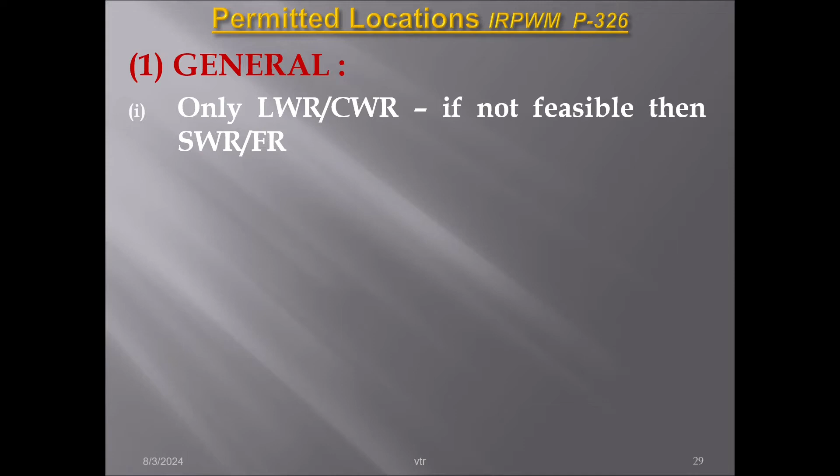Also in yard lines, many yards still have fish plate track. Fish plates give us a lot of headaches, so we want to avoid them. In yard lines also nowadays we are planning for converting existing fish plated or SWR track into LWR, particularly in running lines, provided the condition of rails, sleepers and fittings is alright. With the approval of the Chief Track Engineer, we can convert those lines also into LWR.

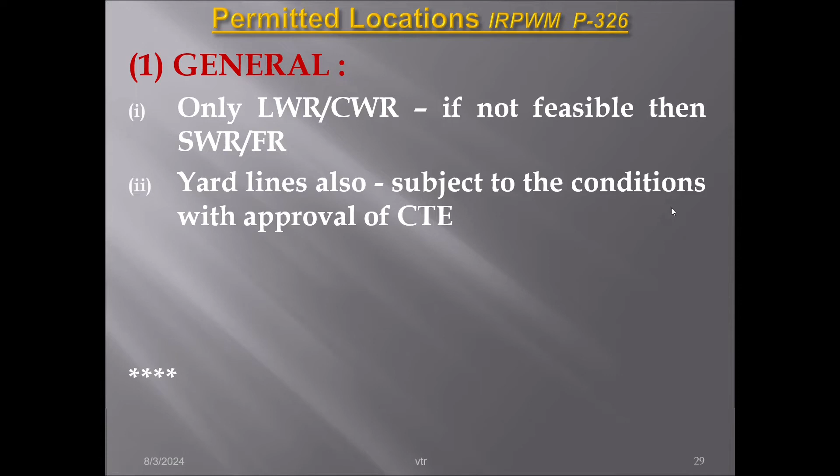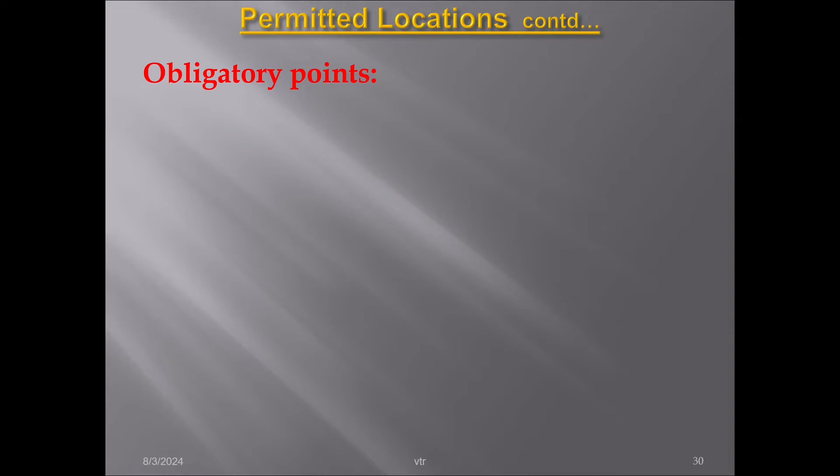This is something about the general provisions. Coming to the other locations, permitted locations - for example, suppose we want to have the track between X and Y, the particular stretch, so we may want to have the LWR.

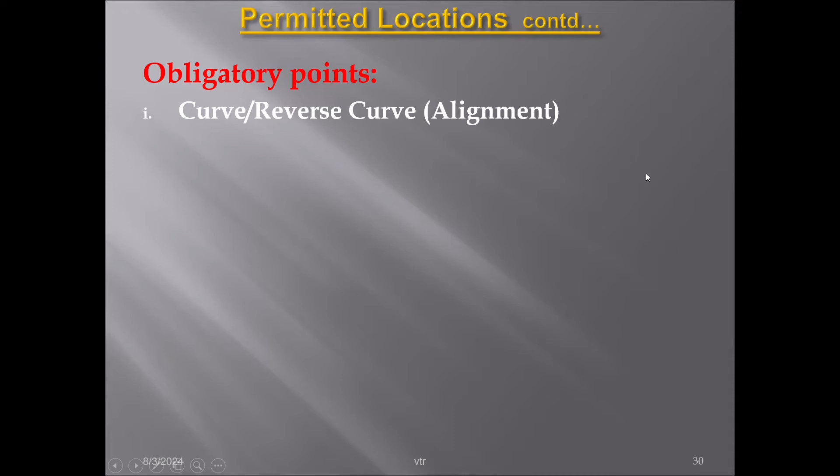There will be a lot of obligatory points we will come across, namely the curve - normally a sharper curve, we cannot go for LWR. Also the gradient - a steeper gradient we are avoiding, and level crossings. On bridges, we have ballasted bridges and girder bridges, and here also we have a lot of limitations. Points and crossings can go, but these are the obligatory points. So curvature - what's the sharpness and limitations - and gradient - what are the limitations - these things we are going to discuss in the coming slides.

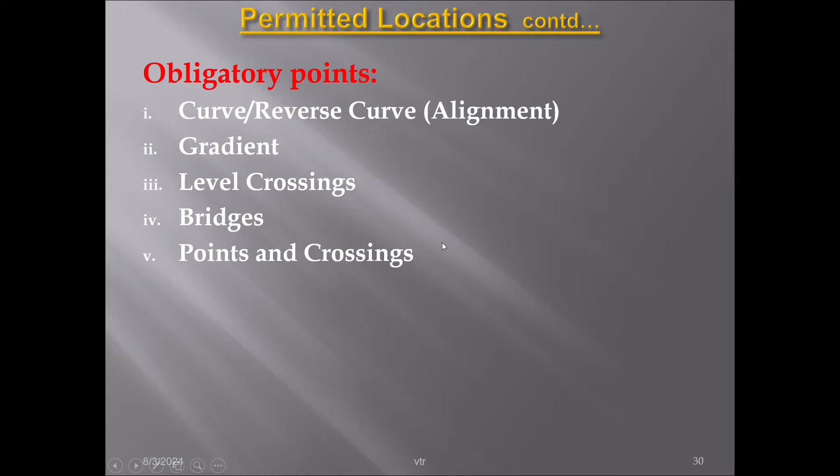Coming to the curve, that is alignment - normally suppose we have 60 kg rail and 1660 sleeper density, we can go up to 6.5 degree of curvature in zone 1 and 2, up to 6 degree in case of zone 3 and 4. These are the provisions available in the manual. Sharper than this we cannot go, and these are given zone-wise.

Also joining with the steep gradient, the steepest gradient is given, so gradient has to be considered. If it is a plain track, normally 6.5 degree in zone 1 and 2, and zone 3 is 6 degree. Suppose we have curvature with gradient, this is the limitation - 5 degree with 1 in 65, the sharpest permitted grade, the steepest gradient. This is the provision available, and we are supposed to follow this.

Because the curve is already a designed curve we have, but whenever there is a temperature increase, there will be setting up of compressive force, which will also try to give the buckling effect, that is bursting force. So joining with the designed curvature should not get aggravated and buckle. That is why if sharper curvature is there, more will be the bursting force - that is why we want to restrict the curvature sharpness. At the same time we are providing shoulder ballasting and strengthening, but even then the sharpness is limited. So this is the restricted curvature as per the Indian Railway Permanent Way manual.

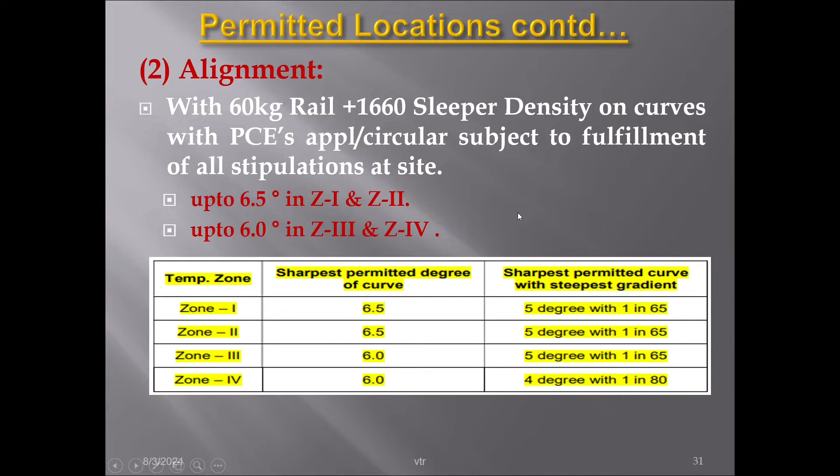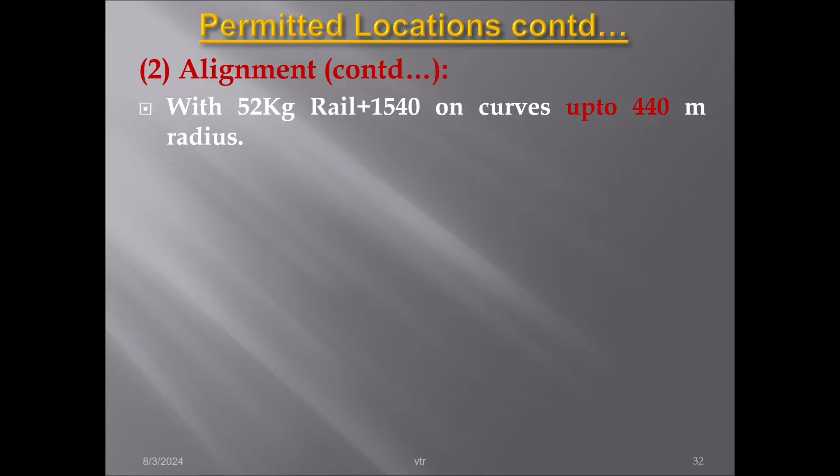1540 sleeper density in the 52 kg rail. Earlier we were having 52 kg, but now everywhere we have 60 kg rail. Whenever we do TR or CTR we go for 60 kg only. But in existing track still we have some places with 52 kg 1540 sleeper density. In this case the curvature can go up to 440 meters, that is 4 degree curvature. Up to 4 degree we can go.

Also in the case of zone 1, they are given some relaxation to 350 meter radius. So up to 5 degree we can have some relaxation. This 52 kg 1540, in zone 1 they are given 350 meter radius, up to 5 degree we can have.

Duly satisfying the following conditions. Because zone 1, as normally already discussed, has less temperature variation, that is why this little relaxation has been given up to 5 degree.

We must ensure 300 mm clean ballast cushion. Normally, in curvature in LWR track we are giving 150 mm extra. So normal shoulder which is 350 in a straight track, but in the case of LWR and curvature, 150 mm extra we are providing, making it 500 mm.

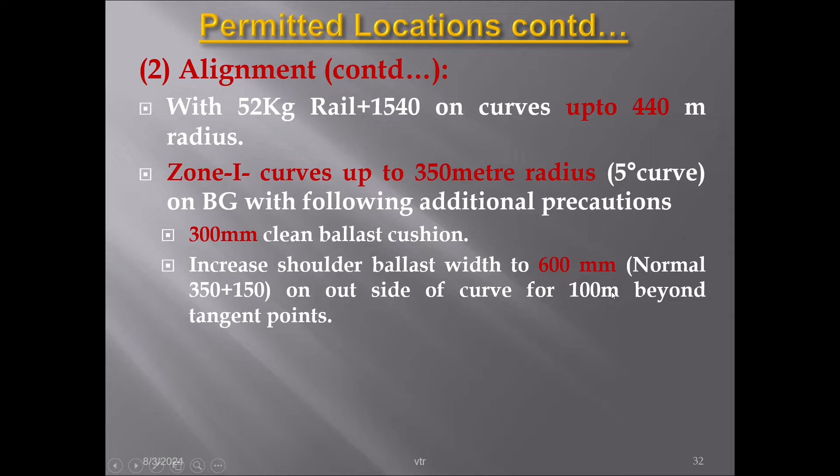But in case we want to have the zone 1, 350 metre radius in 5 degree, we must have extra 100 mm. So total 600 mm shoulder ballast we must ensure. This is something about it.

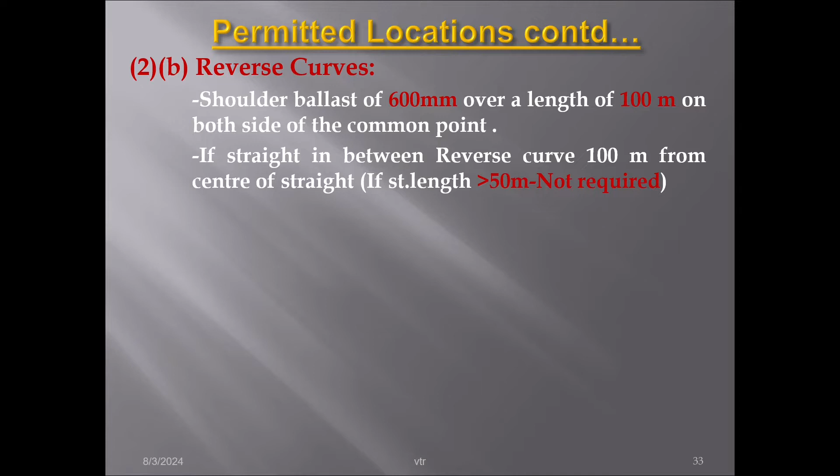Then reverse curve, of course, is also a very critical location because it's a combination of two curves but in reverse direction. The junction point, common tangent point, is so dangerous and serious, so that location should be taken care of. That is why in this case two curves are there.

Normally, if it is considered as a reverse curve, there is no straight in between, it's called a reverse curve. If that is the case, what do you do? This location, as already told, is critical.

So this location we have to strengthen the shoulder ballast. Here this is shoulder ballast, this is shoulder ballast. We have to increase it to 600 mm. I already told 350 mm normally in a straight track and 150 mm normally we are giving extra, but here one more 100 mm we are giving extra. So totally 600 mm shoulder ballast we are ensuring.

At the common tangent point, where the common tangent is there, this side 100 meters, this side 100 meters. The approach of this, both sides 100 meters and 100 meters, we must ensure the shoulder ballast of 600 mm.

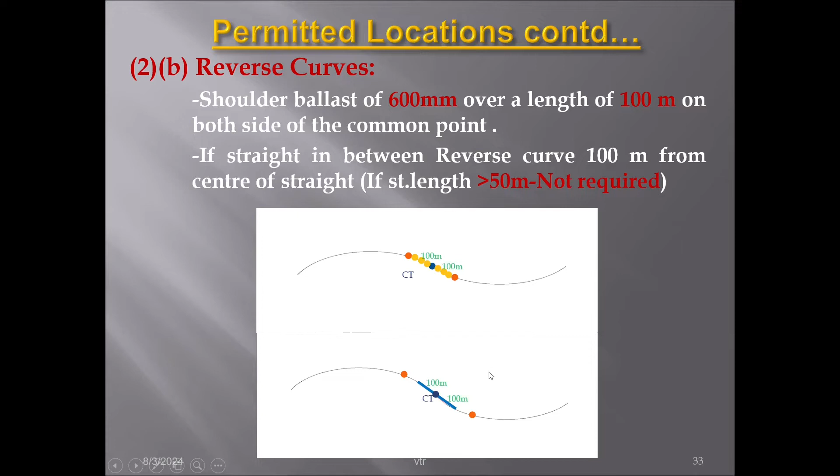Also sometimes we have a straight in between the reverse curve. Suppose the straight available is more than 50 meters, we need not consider it as a reverse curve, it is a separate curve and normal provisions will apply. But when the straight portion is less than 50 meters, as earlier discussed, 100 meters on both sides from the center of the straight, we must ensure the extra shoulder ballasting of 600 mm. This should be followed.

Further, this is why we are restricting the steeper gradient, you all pretty well know. Normally, when our trains are climbing over the gradient with heavy load, it has to apply more tractive effort for climbing over the steep gradient. At the same time, when it is going down the gradient, sometimes there will be more braking force. So both the forces make the steeper gradient excessive.

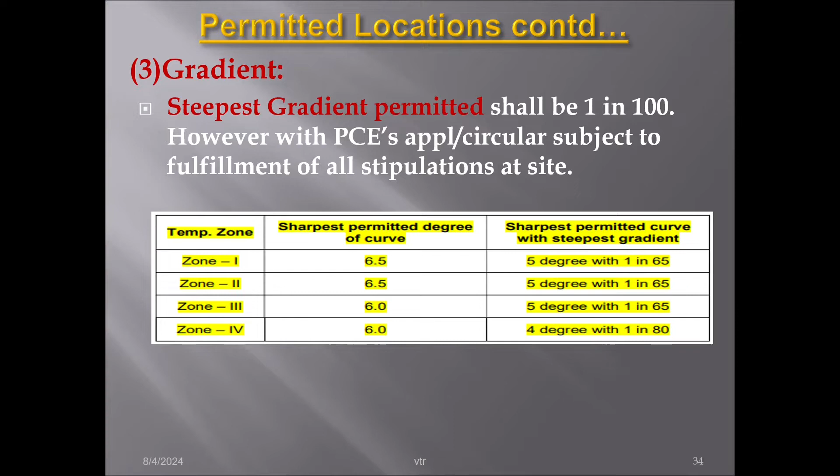Coming to LWR and bridges: LWR, CWR can be continued over bridges with ballasted deck without bearings, like slabs, box culverts and arches. That means RCC slab bridges and PSC slab bridges - the track structure on these bridges will be similar to the track structure in the formations. Completely sleeper, ballast, everything will be there. There is no change of track structure, so we can carry through LWR over those bridges.

There is no restriction. Coming to the unballasted deck bridge, that means girder bridges. Normally there the track structure is different - we don't have any ballast. We only have a rail sleeper frame, having rail free fastening, and the entire frame is fixed, fitted on the girder.

This is different because as far as LWR is concerned, we must have elastic fastening, where some resistance should be offered for controlling the movement of the rail. But here it is absent, so we are providing only rail free fastening normally on the girder bridges. The reason we provide rail free fastening is that there should not be any interaction between the rail and the bridge structure - we want to isolate it.

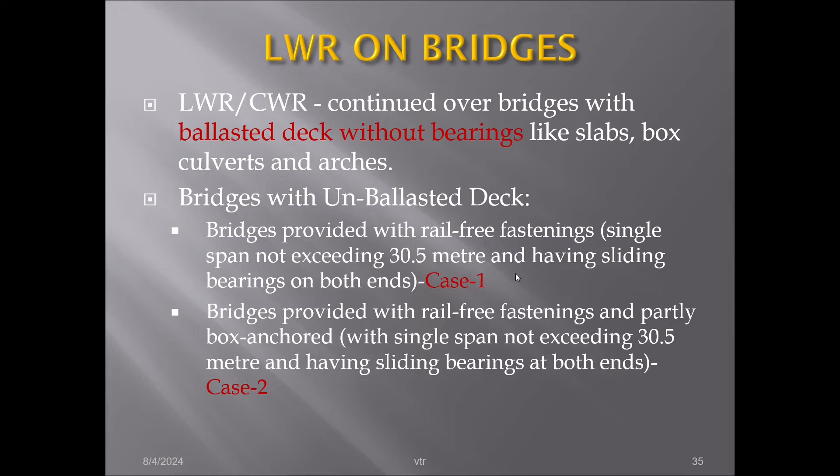So in this case, what is the maximum overall length we can permit? In the second case, because of the box anchoring, we are controlling the longitudinal movement of the rail - that means the creep movement. If movement of traffic is there on one side, the entire rail tries to move, but because of the anchorage we provide, we are not permitting the longitudinal movement. At the same time, the girder is permitted to independently expand and contract at both ends without any interaction with the rail. This is the second case, and for both cases we will see the overall length.

So we have 4 zones - zone 1, 2, 3, 4 - with 60 kg and 52 kg rails. For zone 1, it's 45 meters in the first case, but single span not exceeding 30.5 meters. This is applicable only in the first two cases. Even for other zones, the maximum overall length itself is restricted to 11 meters and 27 meters for 60 kg and 52 kg respectively for all 3 zones - zone 2, 3, 4. Only in one case are we able to go more.

Coming to case 2, similarly, like the previous case, but here we are anchoring the central 4 sleepers, providing anchorage so that there is some resistance holding the rail, not permitting any longitudinal movement. In this case, for zone 1, it's 77 meters overall length for 60 kg and 90 meters for 52 kg. For zone 2, 60 kg is 42 meters and 52 kg is 58 meters. For the rest of the zones, zone 3 and 4, we have only 23 and 43 meters maximum for 60 kg and 52 kg respectively for both cases.

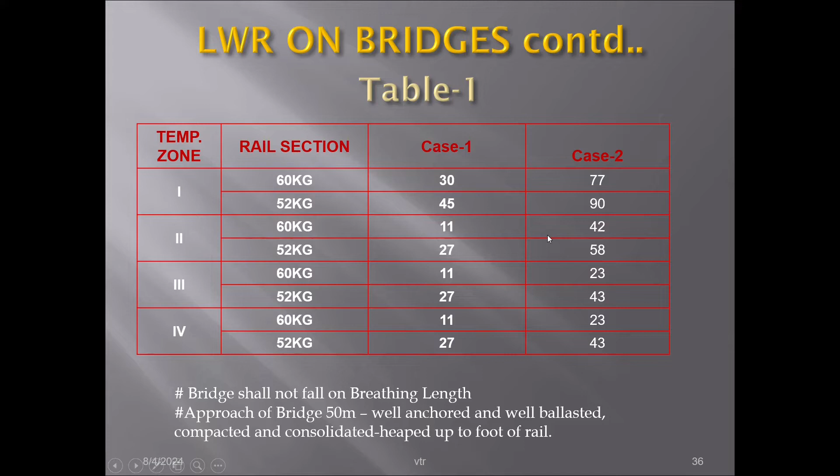This is something about the maximum overall length we are permitting for carrying through LWR in these cases. However, we must ensure the breathing length - the bridge should not fall within the breathing length.

Also in this case, the approaches to the bridges, 50 meters on either side, should be well anchored, well ballasted, compacted, and the ballast should be heaped up to the foot - extra ballasting must be done, keeping it firm. So that even though there is a fracture in the girder, this approach should be sound enough to control the movement. That is why the approaches must be properly looked into, with good ballasting, compaction, and a well consolidated condition. This is something about these two cases.

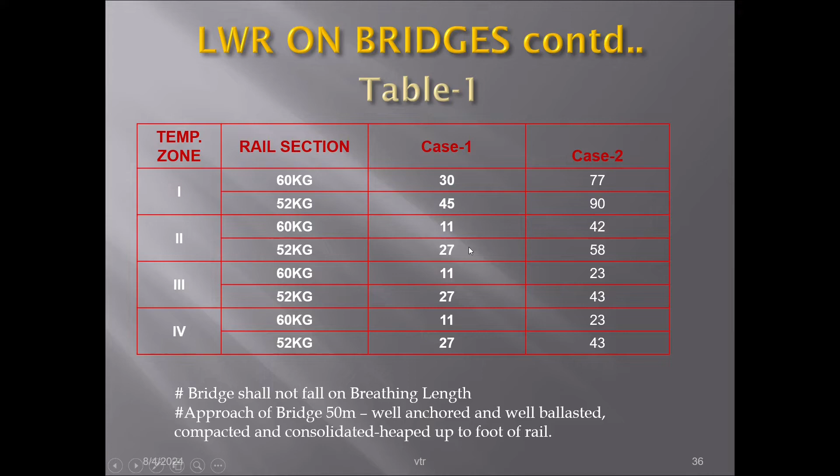Another case we will see here: LWR or CWR may also be carried over bridges with the provision of SEJ at the far end of the approach. In this case, we can permit LWR on the bridges. What happens here is the entire bridge will be within the breathing length, with the SEJ provided at one end.

This is one type. In this case, what will happen, as I already told you, since it is falling in the breathing length, and it's rail free fastening with no offering of ballast resistance, the breathing length will get increased, and ultimately once the breathing length increases, automatically more expansion contraction happens at the SEJ.

So that is why, if that is the case, we are restricting the overall length in the bridge. But here, since due to excess gap we will face in the SCJ because of this situation falling in the breathing length in the rail free fastening condition, we have to go for a special SEJ designed for a maximum gap of 190 mm. This is one case, and the other case is designed for 120 mm. So two cases are there.

In the first one, for zone 1, 2, 3, 4, all four zones, there is an overall restriction. Zone 4 is a critical zone, so only 55 meters we are permitting. Zone 3 is 70 meters. Zone 2 is 110 meters, and zone 1 is okay at 160 meters. So these are all the limitations given for this condition, provided we must have the SEJ of this type.

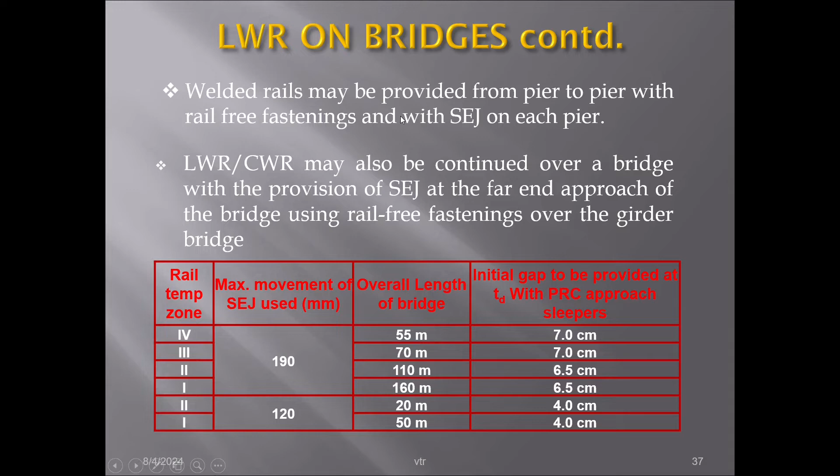In every joint there will be a knocking sound. In this case, what we are doing is welding pier to pier and providing SEJ on the piers. This is one more case. In this case, there are also some restrictions like we will see in the subsequent slides. What is the maximum length? We will see.

Here, this is two cases how it is. As per Indian Permanent Way Manual, there is detailed explanation through the drawing, and the two cases are: pier to pier welding, and providing SCJ at the far end of the bridge. This is the case. And the pier to pier providing with the span, I will tell you later in the second slide. We will see the maximum span and all. Here there are two situations we will come across.

So in this case, we are providing SCJ at every pier, and in between all the joints we are welding it. SCJ we are providing at the pier. But in this case, since it is rail free fastening, some holding must be there to not permit any longitudinal movement of the rail. Otherwise, due to traffic movement, rail will try to move on one side and jam. The SCJ gaps and all will get jammed. That is why, to restrict that, we want to have some holding.

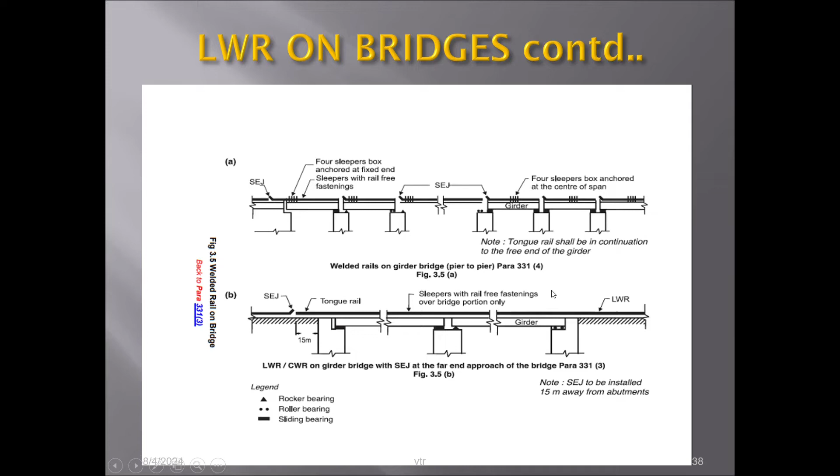Whatever SEJ we provide should be 15 meters away from the abutment. This is something about this one.

Next case: we can provide welded rails in a single span bridge, using the special SEJ with the 190 mm gap SEJ. This is also permitted, but in this case also the maximum overall length is restricted.

The same thing can apply for pier-to-pier, just like a single span. That is not mentioned there, but however the maximum length for single span, the same overall length we can permit when we go for pier-to-pier welding.

Zones 1, 2, 3, 4 have various overall lengths - zone 4 is 75 meters since critical, zone 3 is 87... zone 2 is 110 meters, and zone 1 is 146 meters. This is all for single span.

When we have a single span bridge, we can completely weld all the joints and provide SEJ on both abutments. In this case, we use SEJ designed for a maximum gap of 190 mm, but that SCJ should be provided 30 meters away from both abutments. This is something to follow.

Also, whenever a bridge cannot be carried through - it is not falling within our stipulated provisions - in this case, the bridge should be isolated. That bridge should be isolated with LWR.

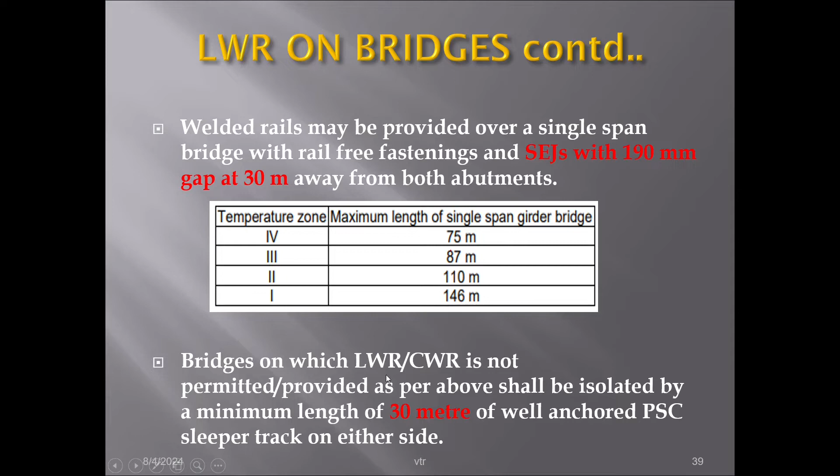So LWR should be terminated at the approach of the bridge, isolating the bridge, and again SCJ is provided, starting the LWR/CWR like that. In this case the minimum length of isolation must be 30 meters on both approach sides. Only after that must we have the SCJ. That portion should be well ballasted, well anchored, well strengthened - that is something about the isolation process.

So this is about LWR on bridges.

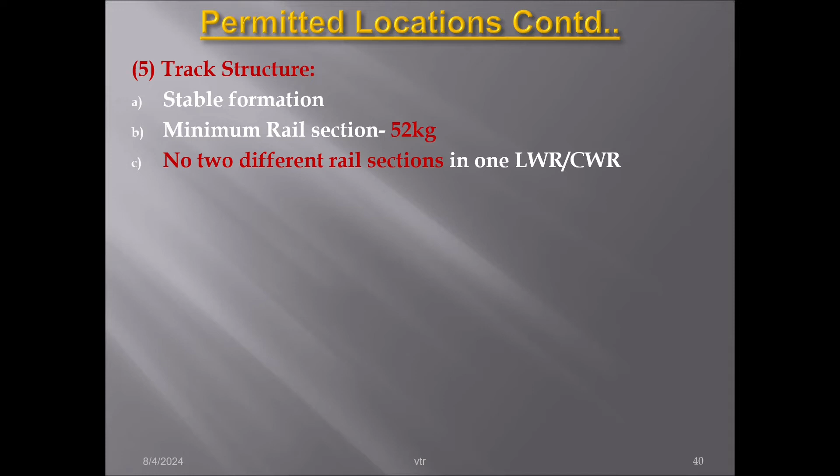Coming to the track structure - this is whatever we have seen earlier about the obligatory points, whatever obligatory points we will come across, and for various obligatory points, what are the limitations we have seen - that we are supposed to follow.

Coming to the track structure - track structure means what? We have the formation and ballast, sleeper, and rail-free fastenings, and rail-sleeper fastenings. These are all the complete track structure we have. But the foundation is our formation, so the formation should be stable.

Whenever you want to have the LWR/CWR, as we already discussed, over the extreme temperature range that rail will have internal force - setting up of internal force should be there. In case temperature increases to the extreme, there will be setting up of maximum compressive force. Similarly, when it goes down to T minimum, there will be setting up of tensile force. Both are critical - the upper side results in buckling, the lower side results in rail fractures.

So in that case, we have to take care of our LWR, and firmly we are keeping it. That is why the foundation is very important. Suppose the foundation is weak...

Nowadays, whenever we go for new construction, we are doing pakka well soil, and also blanketing of minimum 1 meter we are providing. In the earlier cases, those old formations, normally it will be in some form, we don't know how it was constructed.

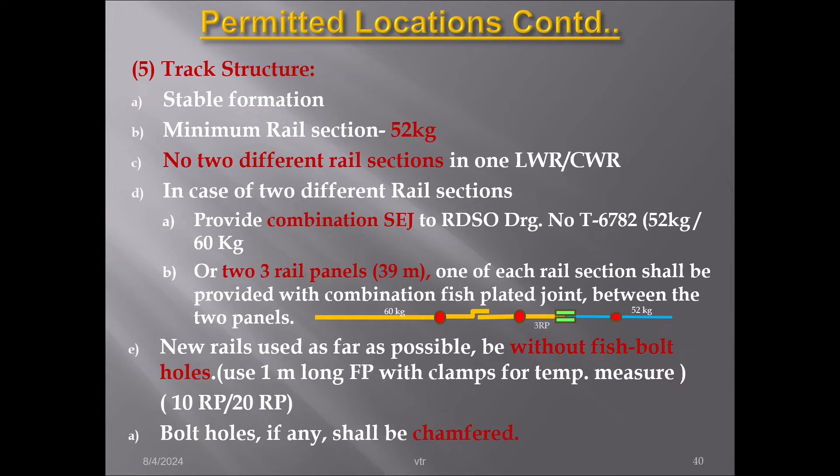And if at all it is unavoidable when you have bolt holes, it shall be chamfered. Chamfering of fish holes, you may be knowing. Chamfering means, normally fish holes have a sharp edge, and we are blunting it using the chamfering process, so that the stress concentration will be minimized. If it is a sharp pointed edge, it results in fracture. When it is blunted, the corner is chamfered.

When expansion, contraction, or impact is there at the bolt hole, the load distribution will be uniform, so you can avoid stress concentration in the corners of the hole, and thereby avoid fish hole failures. That's why necessarily everywhere whenever we do this, fish holes, we have to do chamfering. This is something about it.

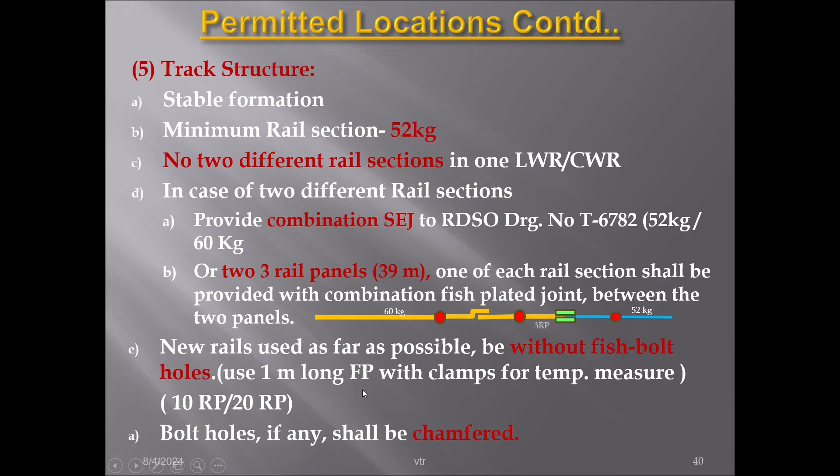Clean ballast of 150 mm must be there for proper packing. Coming to shoulder ballast, 350 mm we must have. And already we have discussed, in case of curvature, we must have 500 mm.

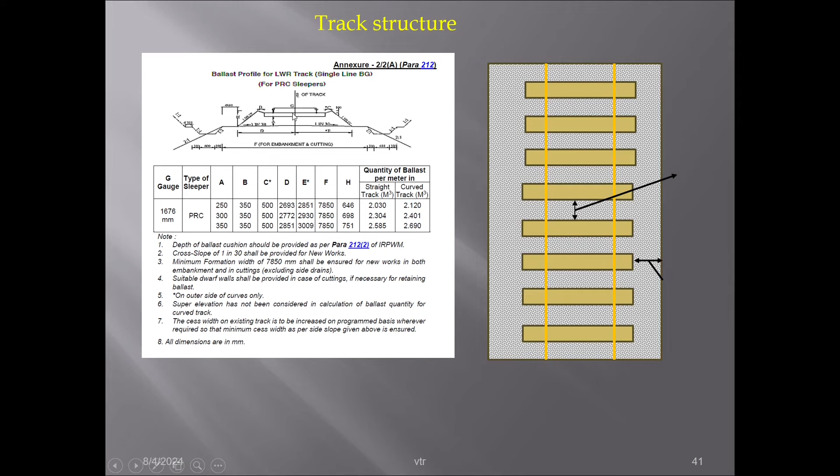Sleepers nowadays we are going with standard PSC sleepers. And of late we are having welded base sleepers, having welded base to offer more resistance. Also for rail and sleeper we are providing elastic fastening with the proper repairable liner. So these are all the track structure we are supposed to ensure. As far as rail is concerned, minimum 50 kg rail we are supposed to use. This is something about the track structure.

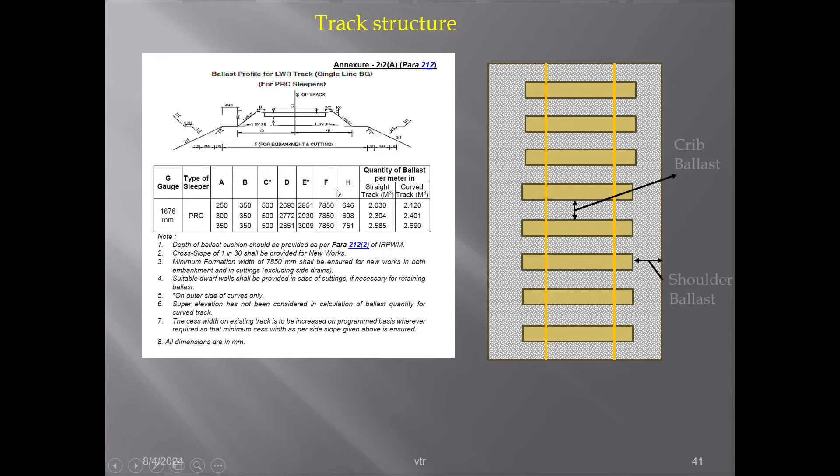Another thing, of late, this LWR on the ballastless track - we have some places where we have introduced ballastless track also. In this case, as per the latest corrections, they have given some stipulations we are supposed to know. Fastenings must satisfy test plan criteria for longitudinal resistance of 15 kN per meter per rail.

That is why it is designed for offering the longitudinal resistance of 15 kN per rail - this we are supposed to ensure. And minimum rail section above 60 kg, and permitted sharp curve here is 350 meters only, and steepest gradient is 1 in 80. This we must ensure.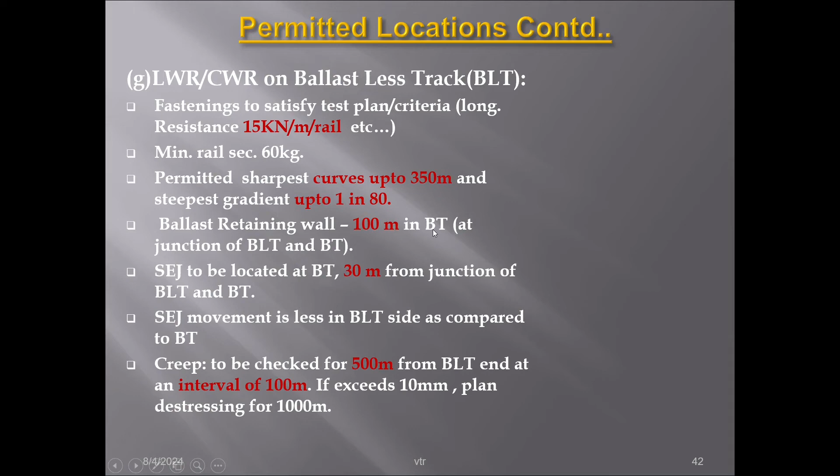Ballast retaining wall - what do you provide 100 meters in the ballasted section? See here, this you have already seen. We provide a ballast retaining wall because this is a ballasted track transitioning to a ballastless track. Suddenly we are coming from ballastless to ballasted to ballastless, so definitely this portion will be disturbed, causing some ballast deficiency. Because of this sudden change, we must ensure proper ballasting here.

So that is why we must provide a 100 meter retaining wall from the junction of the ballasted track and the ballastless track.

The SEJ is to be located at the ballasted track, 30 meters from the junction of the ballast track and the ballastless track. Here, the SEJ must be provided only in the ballast track, where we have the ballast, not in the ballastless track. That should be 30 meters away from the junction where you must have the SEJ.

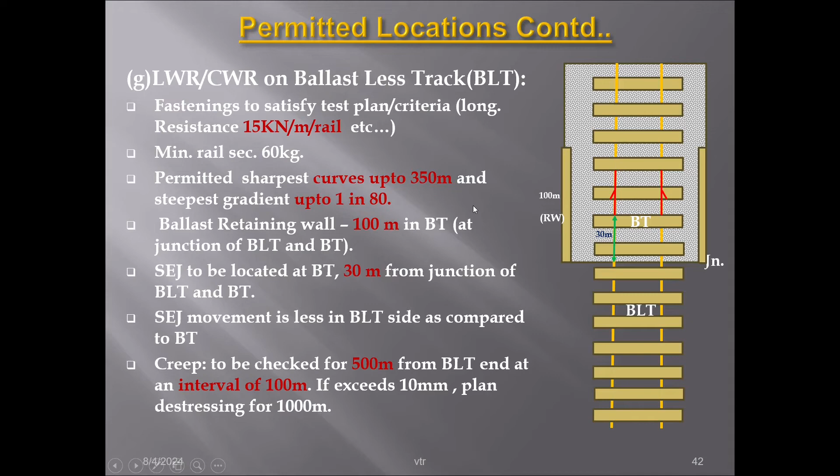Okay, this is something about ballasted track and ballastless track. This correction slip has recently been given and added in the Indian Permanent Way Manual.

And wherever LWR or CWR is followed by a fish plate track - suppose we have LWR/CWR, and some portion has sharper curvature, or it's the approach to a station, and we must necessarily have a fish plate track or SWR, in this case this should be isolated.

The same track structure of LWR/CWR must continue for at least 3 rail lengths beyond the SEJ. So the SEJ is there, and beyond that the same track structure must continue for 3 rail lengths, then your SWR and fish plate track, whatever you have, should be ensured.

At any cost, the level crossing should not fall in the breathing length of the LWR. As I already told you, the breathing length is meant for breathing - we should not have any level crossing there, because a level crossing is a fixed structure that will not permit any breathing expansion, and ultimately the force will be locked up at the approach, resulting in failure, buckling, or fracture. That is why we must ensure the level crossing does not fall in the breathing length. You have to design your LWR this way when laying it.

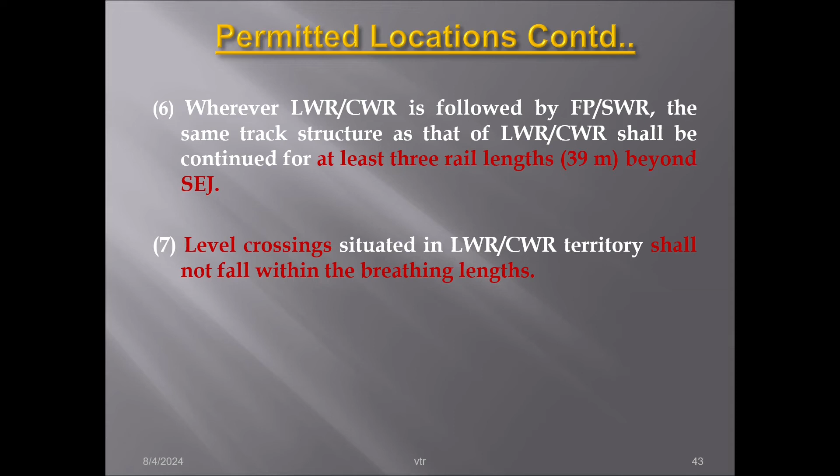So, duly providing the SEJ locations - this is something about it.

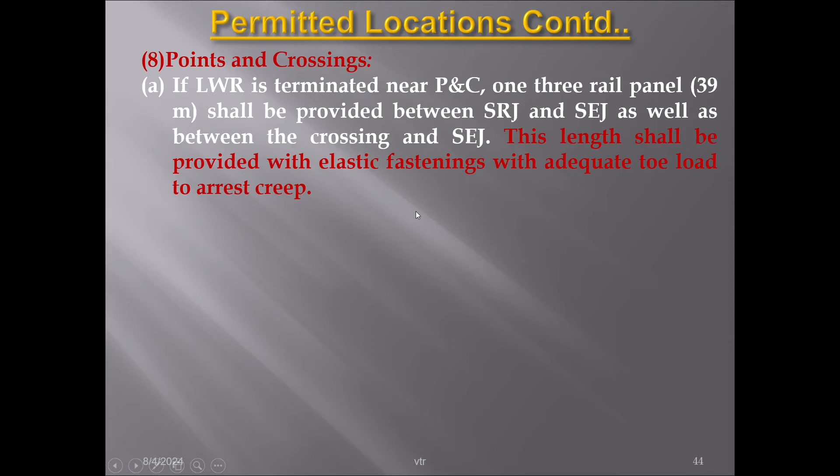And points and crossings - of course, normally points and crossings will be in the station only, in the approach of the station. Normally we are terminating the LWR at the approach of the points and crossing, duly giving the isolation. This should be followed, already provided well anchored with elastic fastenings and all, that should be there.

Suppose we have the LWR here, these are the points and crossing. What will happen? This isolation should be 39 meters in between, okay, 3 rail lengths. Normally you must ensure this. We are terminating our LWR here.

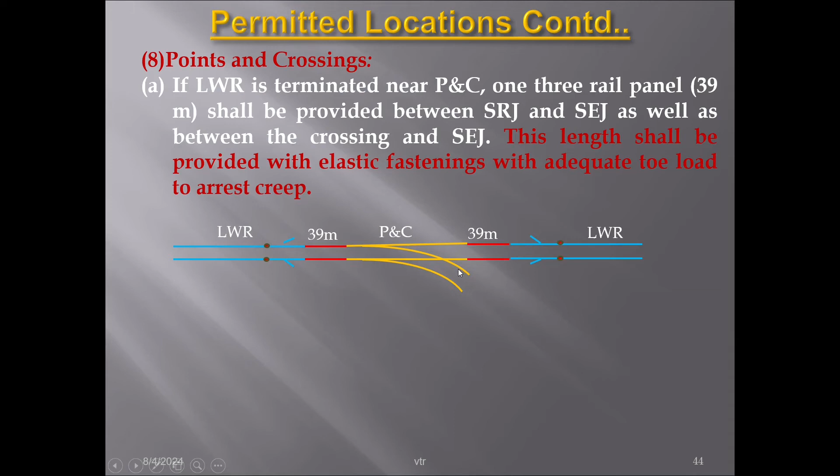These are points and crossing in between the same track. We must have 39 meter isolation, and the same structure of the LWR must follow here. Suppose you want to continue isolating the points and crossing, we can continue this.

Suppose you want to carry through LWR. Why can't we take through LWR on the points and crossing? Because of the discontinuity. Normally, in LWR there should not be any discontinuity, it should be continuous - continuity we must ensure at every point. Because fish plated joints will allow expansion control, and a lot of force will be there. The fish plate bolt will not be able to take that much force, it will fracture. That is why we should not have any

discontinuity in the LWR. But in case of points and crossing, we have discontinuity - at the switch portion we have the discontinuity, at the heel of crossing. Suppose this is one rail through length, no problem - this we are completely welding for continuity.

But here, this is a switch portion - this is your stock rail, this is your tongue rail. This continuity is not there, here there is discontinuity. At the same time, the crossing also will have discontinuity because of CMS crossing - we cannot weld it. Normally we are providing only a frozen joint here.

But if you want to carry the LWR, there are some instructions given in the CT48 report. Following that, you can carry through, but in this case they say we need to strengthen the points and crossing. Particularly, as I told you, at the discontinuity portion we are providing a stress frame, like an anti-creep device.

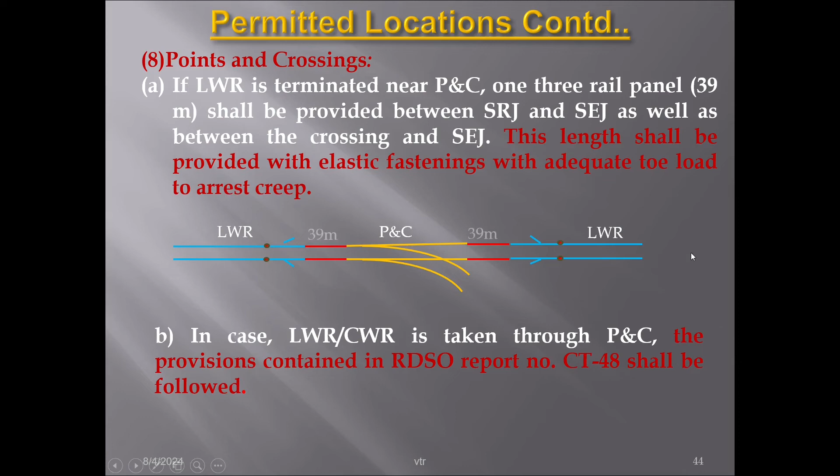Once we take the LWR through the points and crossing continuously, even through stations, that's called CWR. But terminating up to this point is called LWR. When you continue through points and crossing and stations, that is defined as CWR.

Another thing - in a yard, station yard and all, normally we have insulation joints, not only at the station but also in automatic territory. We have it everywhere - insulation joint for signaling purposes.

As I told you, the LWR should not have discontinuity - once discontinuity is there, it will not function as LWR. But anyway, here we have to provide an insulation portion and insulation pad, and there is a discontinuity. However, we are providing insulation, and the rail is cut and we join it with insulation like that. But this joint should act as one piece, like a monolithic piece.

That is why wherever we go for insulated joints, we are providing G3L type insulated joint - it's a glued joint, specially designed. It will not allow any movement, the joint should not permit any longitudinal movement. It is firmly fitted so that it acts as one rail piece, a monolithic piece - designed and manufactured that way. We are providing 6mm insulation pad. It will not allow current from this end to that end - that's why we are putting insulation.

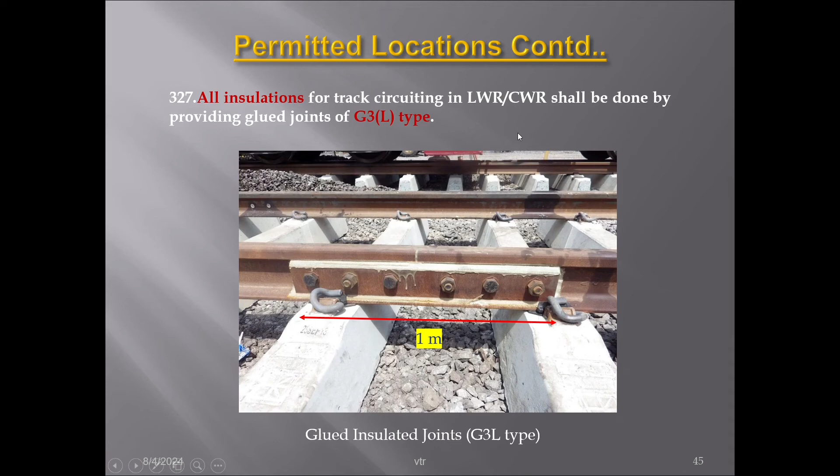Coming to the location of SEJ, as already discussed, we must properly take into account all obligatory points to suitably locate the SEJ. Regarding SEJs, switch expansion joints, where they are supposed to be located—normally the SEJ should not fall in the transition portion, and it should not fall on a curvature sharper than a certain degree, as specified.

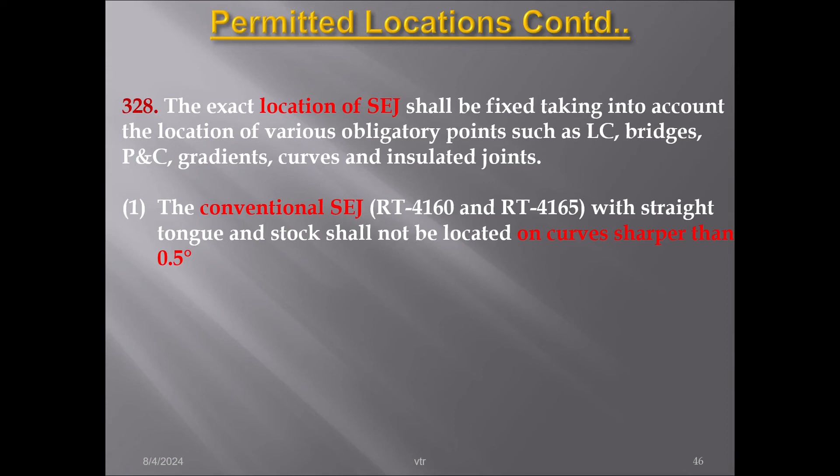See the conventional SEJ, this is the 4 series—4160 and 4165, for 50 kg, 60 kg, and so on. With the straight tongue rail, the stock rail shall not be located on a curve sharper than 0.5 degree. Only this type of SEJ can be provided, with curvature not sharper than 0.5 degree, and it should also not fall in the transition portion.

Why not the transition portion? In the transition portion we are providing super-elevation. The base rail, the inner rail, is horizontal, and the outer rail has super-elevation easing out, like a ramp increase. Since the plane is different there, there's a chance of the tongue rail lifting, and moving wheel traffic may affect and damage the tongue rail.

That is why we normally don't permit locating the SEJ in the transition portion. If permitted in the curve portion, the circular portion, even though there is super-elevation, the level difference will be uniform. But in the first case, 4160 conventional SEJ, we are permitted only on curvature not sharper than 0.5 degree.

Now recently we have special, improved SEJs—the 6 series: 6902, 6914, 6922 and 6930. There are actually two types, both for 50 gauge, for the improved SEJs we now have.

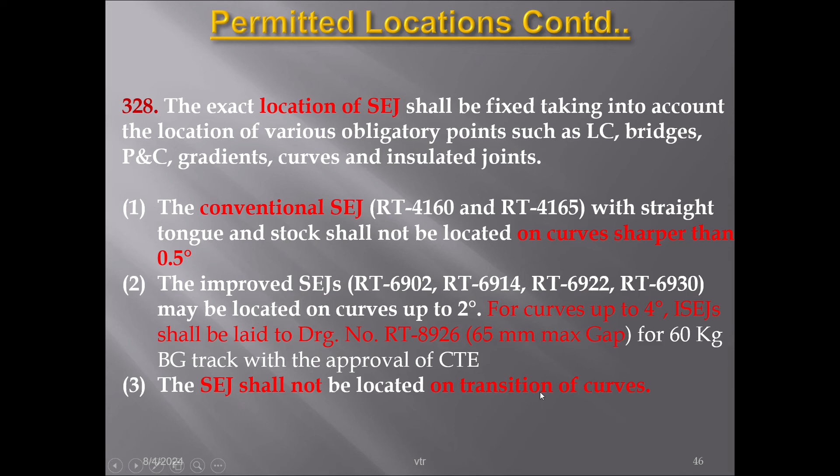Again, SEJ shall not be located in the transition, as already discussed. Okay, this is a different type of SEJ. This is a conventional SEJ, you have learned all. This is only stock rail, this is tongue rail. Okay, this is only the one gap that will be there.

Normally this is a special SEJ sleepers we are having. We are providing some angle also to avoid any sleepers going out of square, and maintaining the sleeper spacing and all. Okay, this is this thing, and we have the reference pillar. It is not that, a reference line will be there, and this and all regarding measurement I will discuss in the next videos while discussing the destressing operation.

Okay, this is one type. This is 4160 and 4165, for 50 kg and 60 kg. This is a conventional type. Okay, this is tongue rail, stock rail. This has the permit for expansion and contraction.

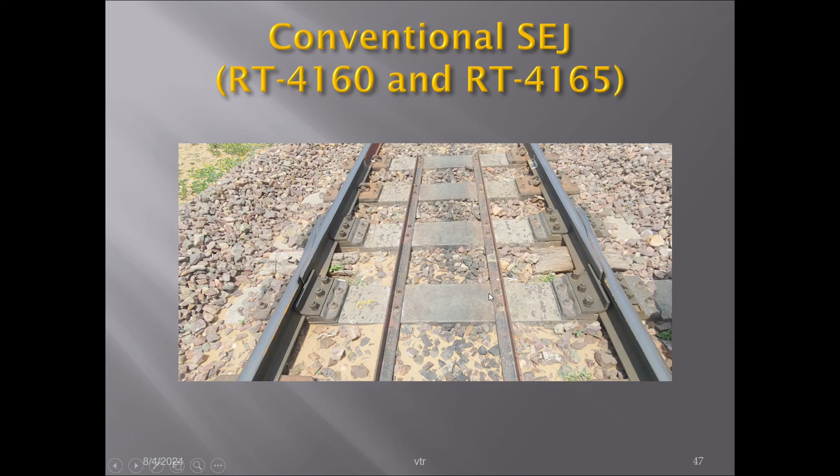Okay, earlier the initial gap was 60 mm, maximum design 120 mm, for this type of SEJ. Nowadays we are providing only 40 mm initial gap and design is 80 mm gap. Okay, this is a conventional SEJ.

Approval for laying. Coming to the approval for laying LWR CWR. Whenever we want to plan LWR CWR from X to Y, a proposal has to be initiated and it should be submitted to CTE for approval. On approval of CTE, then we can go for this one. And a detailed plan we have to submit showing all details of this one.

Between X and Y, all the structures such as profile and signal positions, curvature, gradient, everything must be shown. And the plan should be prepared at 1:5,000 scale in the horizontal plane. So we must prepare and submit to the CTE for approval.

On approval of this thing, you have to go for this one. For existing lines, of course, but for a new line, new LWR or CWR we want to propose, you have to go for the approval, and after getting approval from CTE, you have to plan. And regarding any deviation from the provisions of the LWR manual, approval of PCE is required. This also must be obtained.

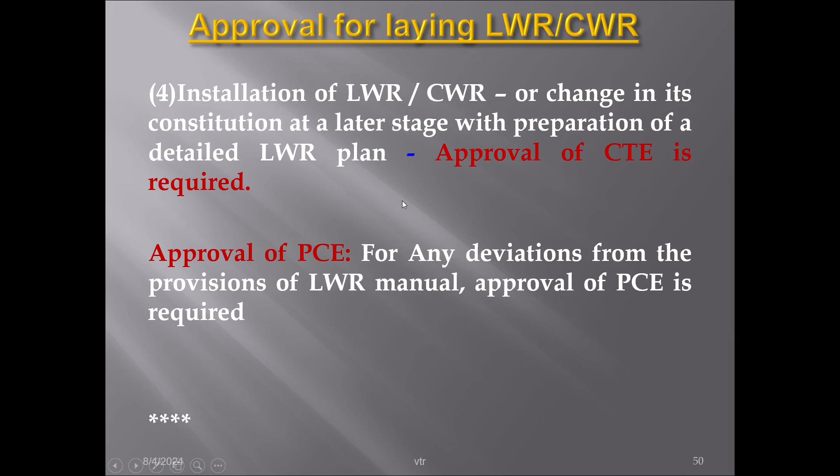This again, this is actually the proposal what we are sending. It is available in the Indian Railway Permanent Way Manual. All these details we must give, like profile and gradient and whatever station details, everything showing gradients, bridges, all these things, track, switches, stations, everything, and height of the catenary.

All these things you have to show, ballast cushion, how much, and what is the existing track, rail sleeper fastenings, and position of signal and insulated joints wherever we have, and where you are going to plan SEJs and all, okay, and proposed ballast cushion, any rehabilitation work in progress or to be undertaken. So any weak formation there, and all proposed things we have to put in the plan, prepared at 1:5,000 horizontal scale. We have to submit to the CTE for approval.

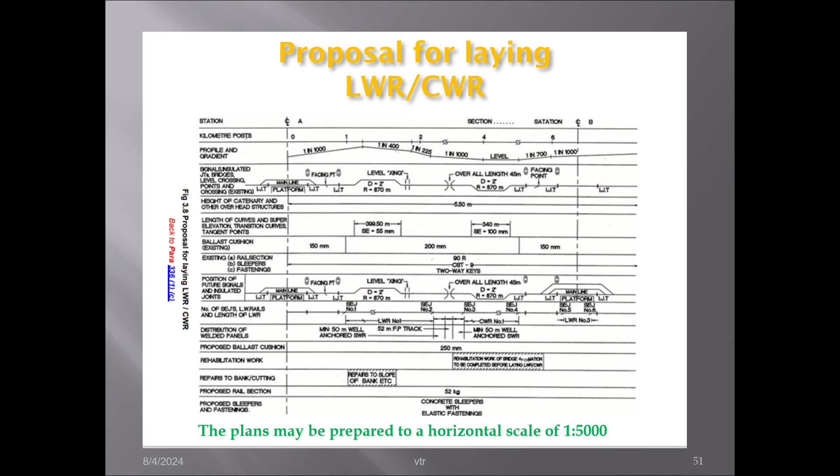Okay, this one is about newly converting SWR into LWR. This we have to follow. Okay, and laying of LWR CWR. See...

Already, whenever you want to lay LWR CWR, converting the existing SWR into LWR, first we have to do a complete survey of the section proposed for laying LWR CWR. Completely we have to collect all details required for sending our proposal, and all the deficiencies shall be made good before laying LWR.

And for laying LWR, you have to keep all the materials and equipment ready, whatever welding equipment, welding material, all these things, and other materials required for renewals and all. You have to keep it ready for carrying out this LWR work.

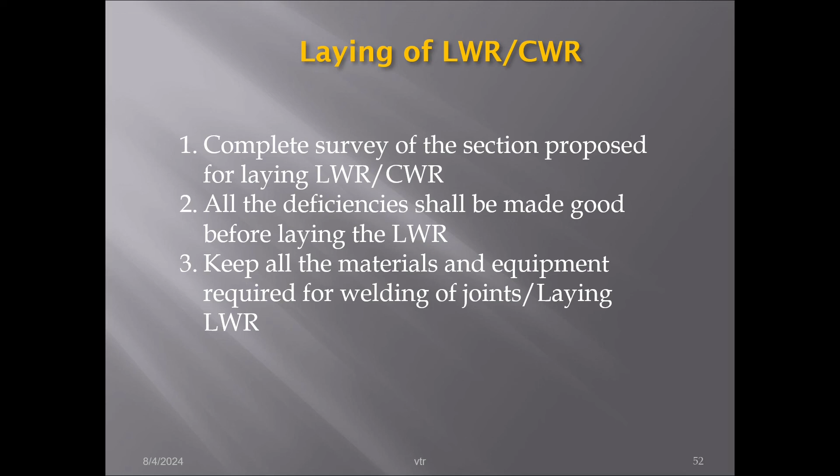Then, laying suppose A to B, we want to lay LWR. Normally, we must have any 3 rail panel, 10 rail panel, or 20 rail panel. Suppose 3 rail panel we already have, normally we should not convert directly from free rail track. Normally, free rail track we don't have. If it is there, we have to convert to 3 rail panel and then LWR. Suppose already we have the SWR 3 rail panel, we can go for this one.

Suppose we are doing CTR, TRR and all, unloading our 10 rail panel, 20 rail panel, first we will complete this one, and finally we have to weld all the rest of the fish plated joints, like that we have to do it. Suppose we have the station, the stretch in between A and B, we want to convert into LWR after this, after doing our TRR or CTR or laying a new track.

First, we are providing with the fish plates. Normally 1 meter long fish plates we must have, when you are reducing the number of fish holes, using clamps and all. First we have to do it.

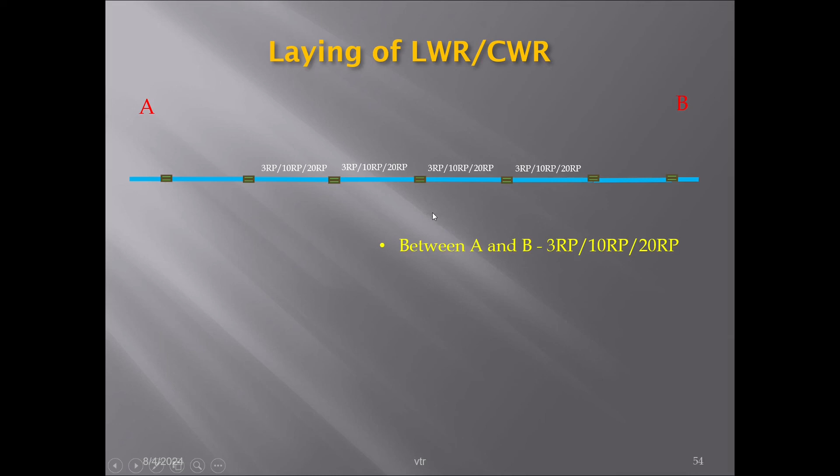And subsequently, this is a stretch we want to have. First we have to locate the SEJ point, and we have to insert the SEJ along with the 4 meter cut rail. We have to do it. Okay, then what to do?

Then after that, this in between we can weld all the joints. In between we have to weld all the joints.

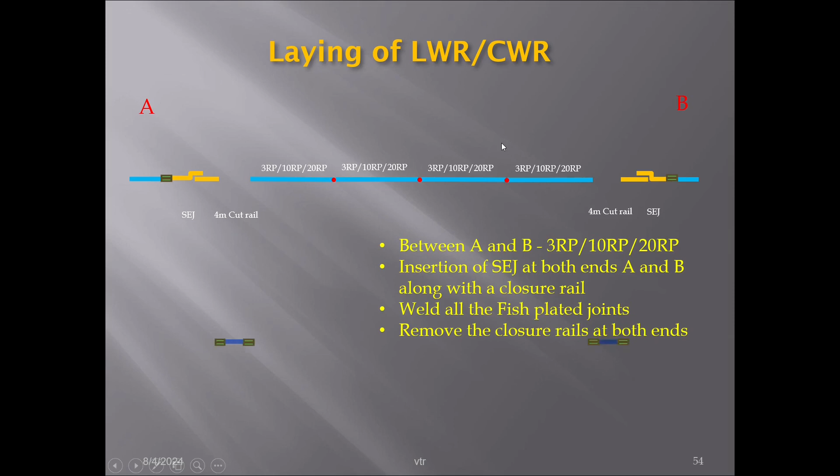And after that, we have to do the de-stressing. The de-stressing of rail should be done. Normally de-stressing maximum 1 kilometer, normally it is advisable to cover. Then only it will be the proper stress. Releasing of forces will take place. Maximum 1 kilometer length.

So after doing the de-stressing, what will happen? There will be change in length here. The gap will be more or less because of locked up stress, it is tensile force. Normally it will contract; the compressive force, it will expand. No, there will be a difference in length.

And also we have to adjust the SEJ now. We have to adjust the SEJ here, the gap. We have to keep the SEJ in mean position with reference to a reference pillar to be erected and marked. SEJ after, because correct initial gap is because when we are doing de-stressing, it is at TD temperature.

We are doing the de-stressing, and the gap should be at TD initial gap of 40 mm. We are setting it, and after that what we are doing, we have to measure the resultant gap and put the rail, duly giving the allowance for welding, under 20 mm allowance, we have to put the rail, and finally we have to weld all the joints here.

Something about, suppose if it is 1 kilometer means 2 SEJ will be there. Suppose it is 5 kilometers, what will happen? So this is SEJ location, but only 1 kilometer we have to go. After that we have to do de-stressing. This side we have to adjust the SEJ, and this side we'll have some closure and gap will be there after de-stressing.

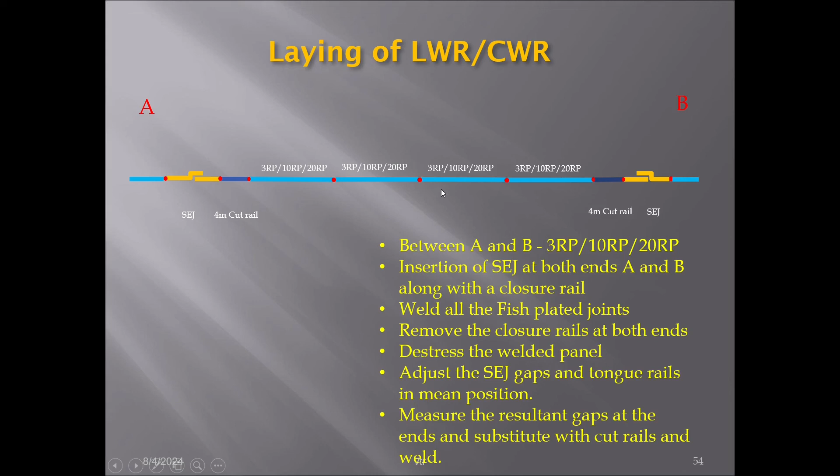Just I am telling you, almost permanent way engineers who are on the field may be knowing about this one, and this is the idea I have given for others who are not knowing this one. So this is about the laying of LWR, and I think this will be useful for you. I hope that I explained to your requirement, to your satisfaction. Thanks a lot, and with that we will conclude this laying of LWR portion, and next slide.